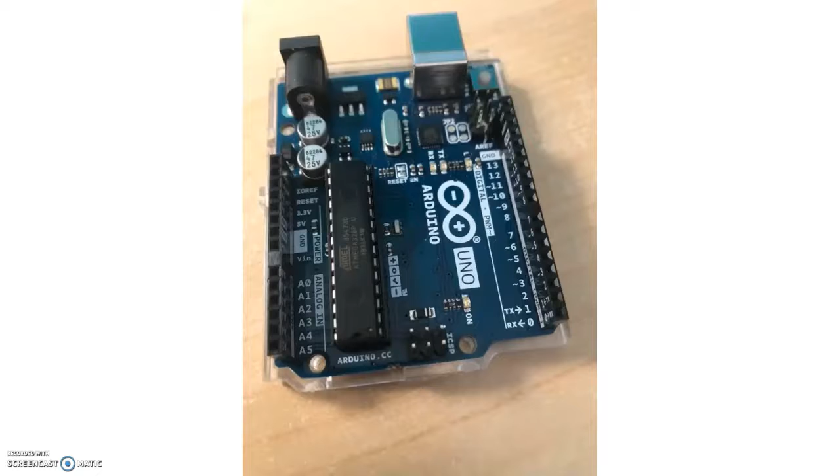So first, we have an Arduino motherboard, which is powered by our computer. A battery could also be used here, but we did not want to buy one. To the Arduino board are attached a muscle sensor that can either be placed on our forearm or biceps, and a servo motor that is placed within the robotic arm.

So what happens is that the muscle sensor reads our muscle contraction and sends the value it reads to the Arduino board. Within the Arduino board, we use the Arduino's own programming language to write this program where we first set a threshold value. This threshold value is found by testing several times the contraction's value when our muscle is relaxed and when it is contracted. The threshold value is a value when the muscle is relaxed.

At the threshold value, Arduino will tell the motor to turn its gears, which we will see in a demonstration appearing at the end of the video, at a 0-degree angle. However, if we contract our muscle, the signal will then surpass the threshold value, and if it does, Arduino will tell the motor to turn its gears at maximum, which is in half circular rotation, so 180 degrees.

As the gears are undergoing this rotation, it creates torsion on the strings, which we have surrounding the gears. Hence, the strings get pulled back, thus creating the motion of fingers that close up. And of course, when the gears return to the initial position, the strings are released, and the fingers will then naturally fall back.

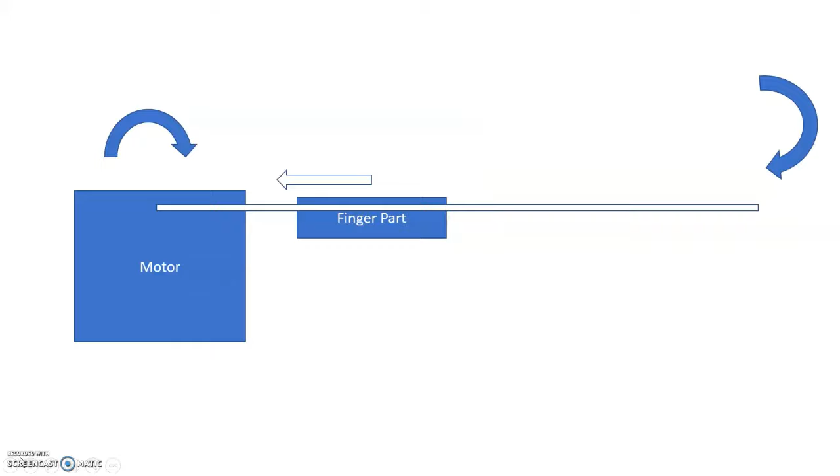The system of the whole circuit is connected using jumper wires, and we had to solder the wires onto the muscle sensor so it could be connected to the Arduino board. The motor did not need to be soldered since it came with an adapter. The sensor is plugged into an analog input because it is required to read certain values and then send them to the board. The motor is plugged into a PWM output because it either reads a 0 or 1. The gears either rotate or not rotate based on the instructions of the board.

The negative of both motor and sensor are attached to ground because we want the positive to have a rated voltage. Then the positive of the motor is 5 volts, and the positive of the sensor is 3.3 volts, because those are the two power source choices on the Arduino Uno board.

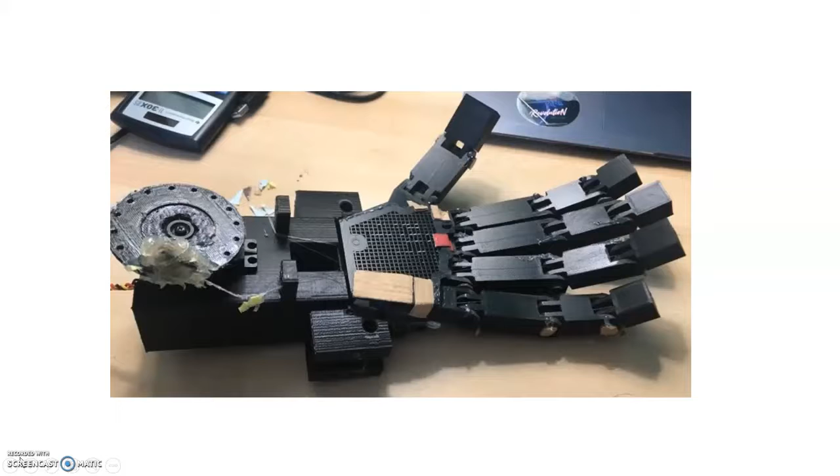The choice of hardware was pretty simple. We thought that Arduino was the easiest to manipulate, and the MyoWare muscle sensor was the cheapest we found. The arm and fingers were ABS plastic 3D printed, which also was the cheapest. And to be honest, they also look pretty good. As for the structure itself, we used Tinkercad to design all the pieces.

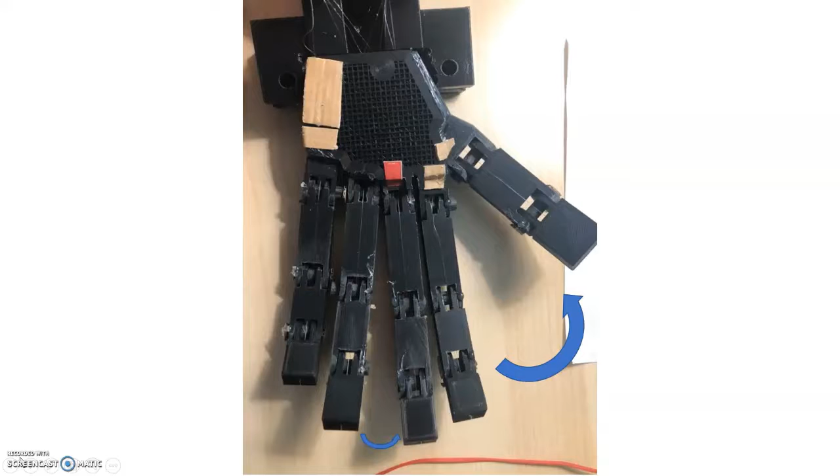Each finger, except for the thumb, is composed of 3 pieces, all of them connected through the holes with a separate cylindrical piece. These fingers are then connected together to the palm using the same method. As you can see, there are spaces between each finger, intentionally done, since our fingers normally aren't stuck together like sardines. Within the fingers, there are 2 holes that pass through them. These passages allow the string to pass through the fingers.

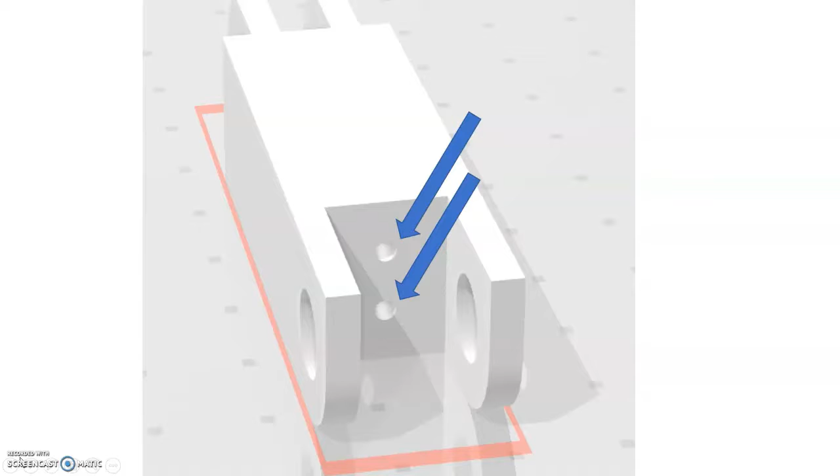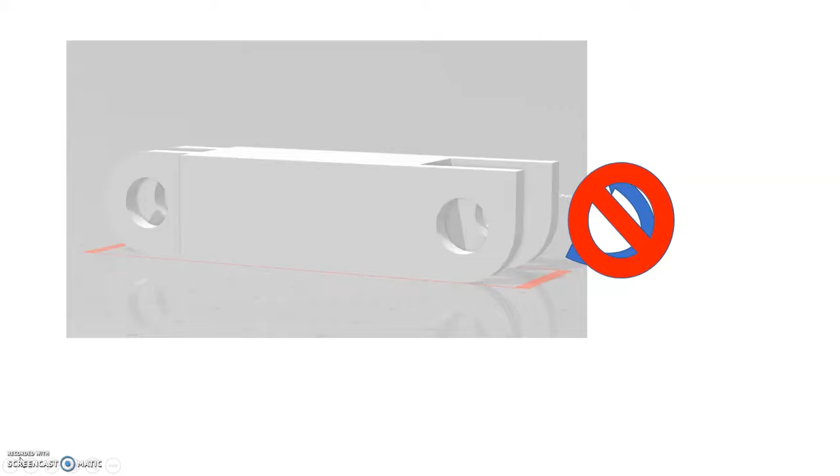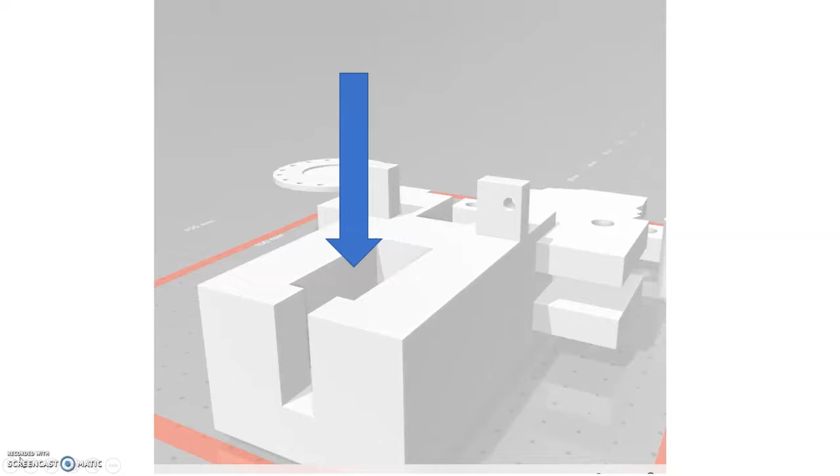There is then this other piece that represents a makeshift forearm. It is made so that the back of the hand would fit inside within the space between the protruding parts pointed by the arrows. Its use is mostly for the space in the back, where the motor would fit. With this, it will allow the motor to properly work without being pulled forward by the strings.

Meanwhile, the space in the front is there to allow some room for the strings coming from the hand to exit and be able to reach the motor, since without it, the cavity where the strings are in the hand would have no exit.

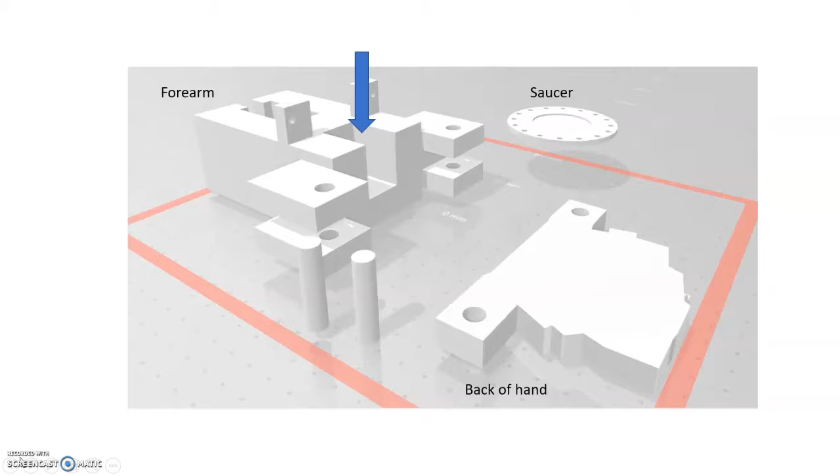Finally, the little saucer was designed to fit onto the motor to try to augment its circumference. Since our motor has a limited range of movement, it can only pull on the strings by so much. By adding this piece that has a larger radius, it will allow the motor to pull much more while keeping the same range of movement.

For the strings, we decided to go for fishing string since it is pretty strong while still having some malleability. A lot of hot glue and super glue was then used to make sure that the structure remains as firm as possible.

For the 3D printing, if you use your own printer, the materials can be as cheap as $20 for all the pieces. However, ordering it from a company will be much costlier, the lowest being around $230 for all the 3D parts. As such, including everything from the 3D printing to the Arduino board and muscle sensor, the cost of such a project could range from $170 to $380.

While this might sound a bit costly, it's still much cheaper than your usual prosthetic, with a cosmetic one going for $5,000, a functional one going for around $10,000 if it ends with a split hook, and the high-tech myoelectric ones that are controlled with muscle sensors can go from around $20,000 to $100,000. This is why 3D printing can be a much more affordable alternative to the current market. Here is a little video showing our product at work.